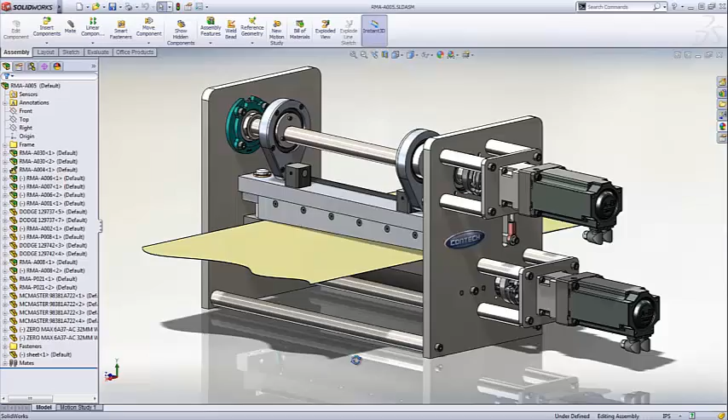Speaking about our TolAnalyst tool inside of SOLIDWORKS Premium. TolAnalyst is a tolerance analysis tool used to study the effects that tolerances and assembly methods have on dimensional stack-up between components of an assembly.

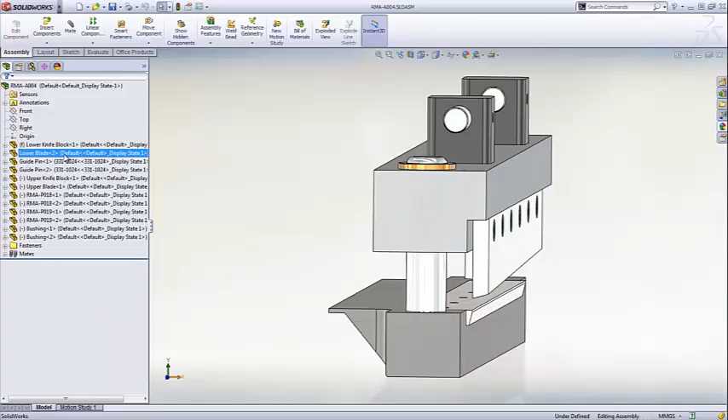For instance, in this sheeter, it's critical that the knife assembly maintains a certain gap between the blades to maintain proper cutting performance. There are several components of this assembly which contribute to this gap, such as the blades, the holders, bushing, and pins. TolAnalyst leverages product and manufacturing information, or PMI, which is created on the parts with

the DimXpert tool. To minimize stack-up, we will control the location of the holes from the blade mounting surface, or datum A, and choose a press fit tolerance for the bore.

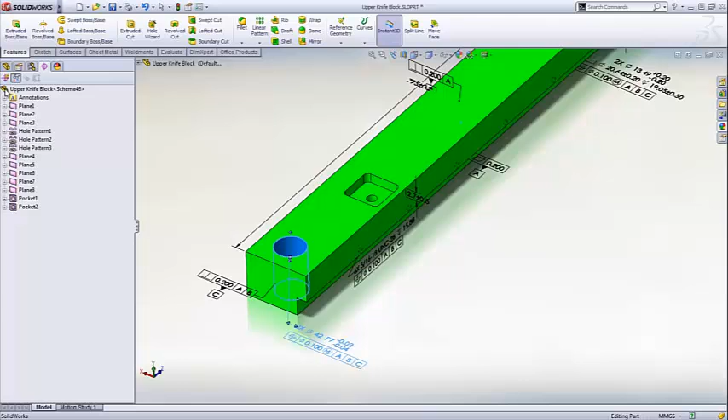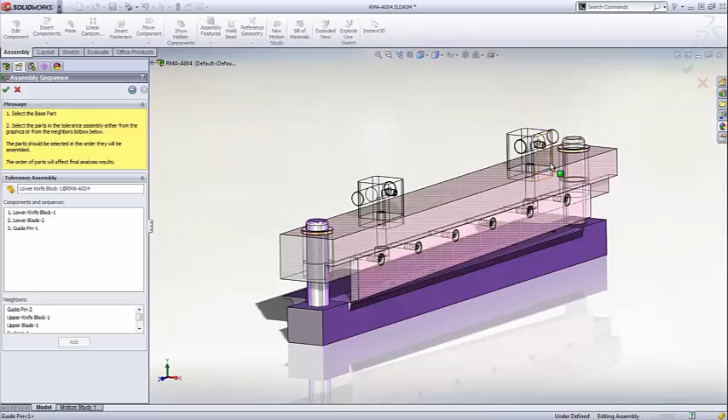In the assembly, a TolAnalyst study walks you through a four-step procedure. First, we will identify a measurement that we want to analyze. In this case, the gap between the upper and lower blades. Next, we identify an assembly sequence. The lower blades are assembled first, then the guide pins, the bushing, the upper blade holder, and finally the upper blade.

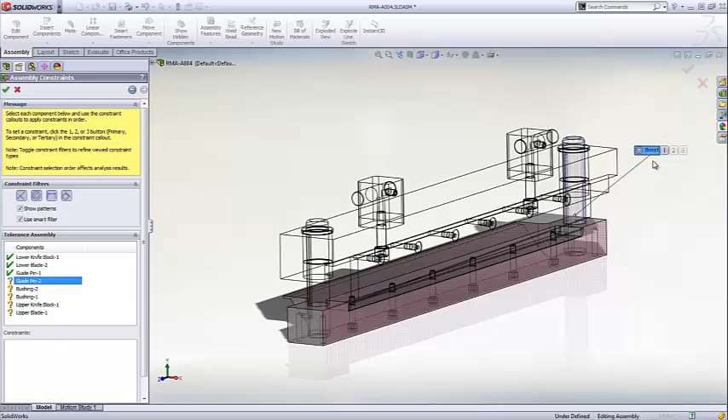Next, we identify how each part is placed or constrained on the assembly. Here, TolAnalyst is leveraging the PMI information from DimXpert. For the blade, there are two placement constraints. We're only concerned about the X, so we'll choose that one. The guide pins are constrained in the holes in the lower blade block. The inside diameter of the bushing to the guide pins.

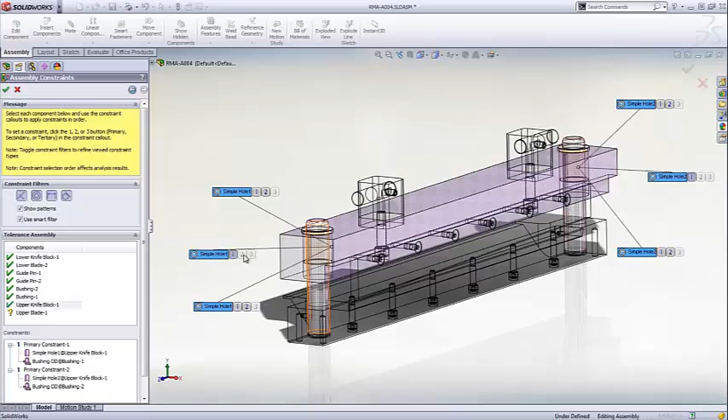The upper knife block can be constrained to the guide pin OD or ID. We'll choose to constrain the outside diameter of the bushings to the upper knife block to simulate a press fit. And finally, we'll constrain the blade to the upper knife block.

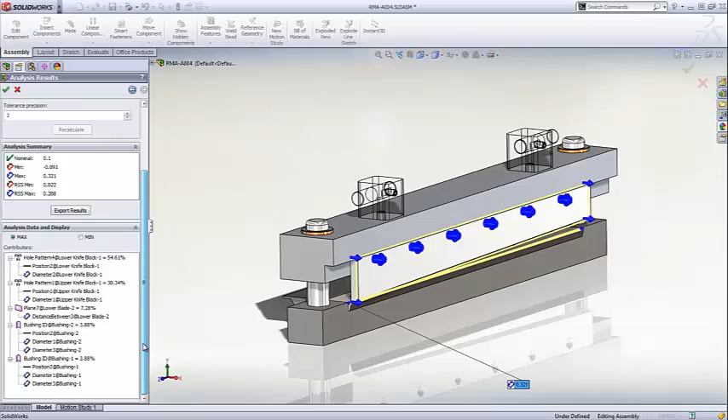In the analysis results, we are presented with nominal measurement, worst case, minimum, maximum, as well as the root sum squared, or RSS. For example, to maintain a proper cutting performance, we need the gap between 0 and 0.25 millimeters. The contributor list states each contributing feature and its percent contribution on the worst case, minimum, or maximum.

When you select an item on the list, the dimension or tolerance appears in the graphics area. Double-click it, and we can change that tolerance right here in our graphics area. Here, we will change the position tolerance and then recalculate. We still don't meet our desired results.

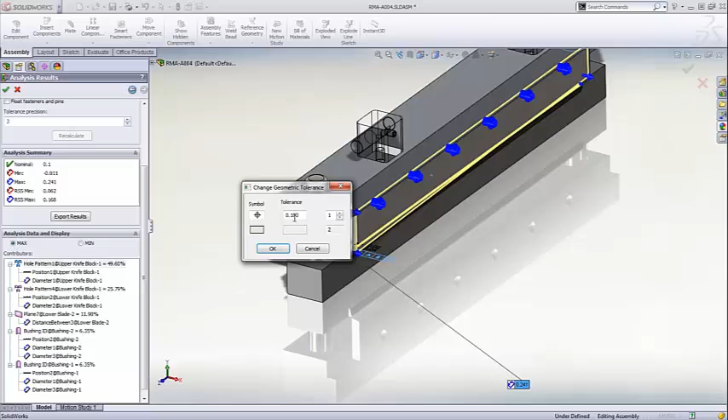The upper knife block is now the highest contributing feature. Let's tighten up the position tolerance on this one as well and recalculate. We now meet our desired goal. But what if we consider the float in the guide pins? These close running fits add a bit to the calculated gap, but we are still within our results.

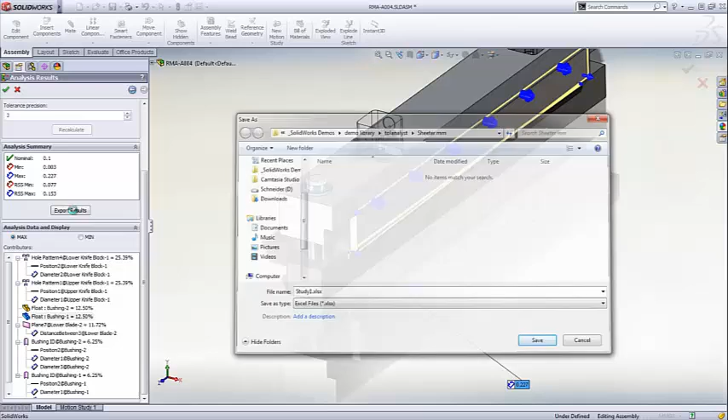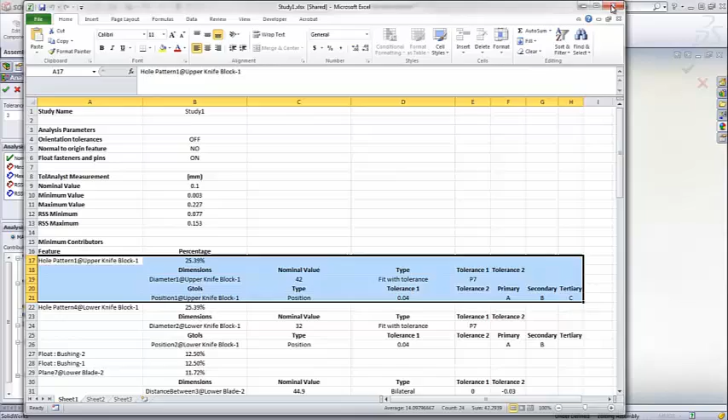Finally, these results can be exported to an Excel spreadsheet to document the tolerance stack-up. This includes the analysis parameters, the measurement results, and the tolerance information for each of the features. TolAnalyst is an essential tool to ensure that the components of your assembly always fit together and meet performance requirements.